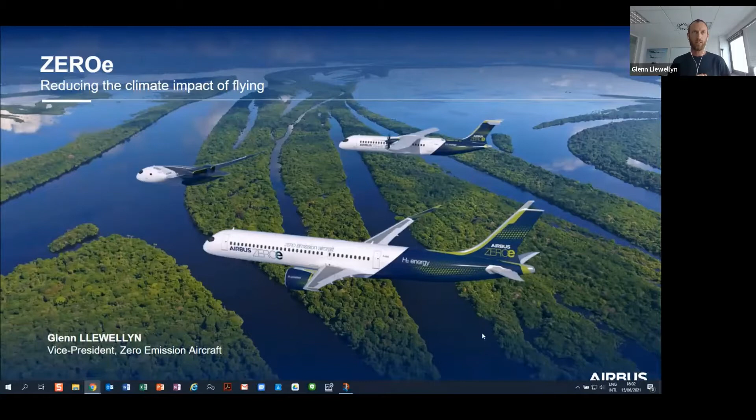I will just share my screen. What you should see in a few seconds is an image of the 3 aircraft which we revealed in September last year - 3 concept aircraft in our family of zero emission aircraft that we are studying. You can see 2 tube and wing configuration aircraft, a turbofan in the front of the image, a turboprop towards the rear, and a blended wing body towards the left. All of these aircraft are hydrogen powered, and we believe hydrogen really has the most potential compared to every other option to reduce or potentially eliminate aviation's climate impact.

I'd like to share with you a little bit about why we're doing this. This is a massive shift for our industry, something we've reflected a lot on, and I'd like to help you understand why Airbus is going in this direction. I'll share more detail about the aircraft and then about some of the technologies we are working on and progressing as part of the project.

So first, a little bit about the why. Many of you will have seen the change in societal expectation and also in regulatory expectation when it comes to climate. We've seen that very much so from Airbus. We started this zero emission project soon after the Paris Agreement, trying to understand how we need to change our business for the future. In 2019, 2020, and even the beginning of 2021, we've seen the trend accelerate quite significantly.

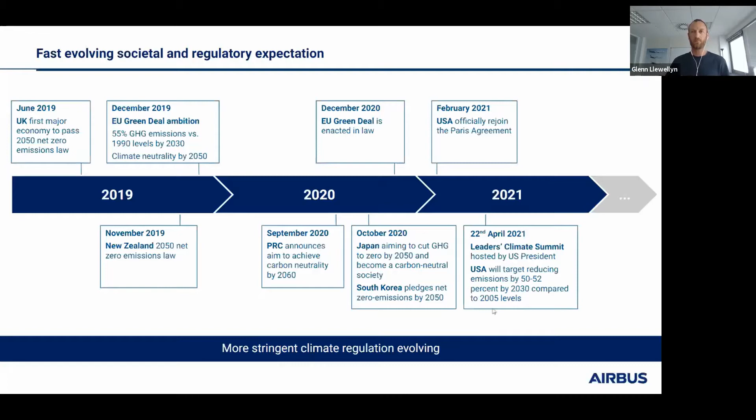The aviation industry has set itself extremely ambitious targets in terms of overall emissions reduction. When we analyze the changes that need to be made, in terms of aircraft performance improvement and energy carriers, we see that all of those are needed. There's really no silver bullet, it's going to be a combination of multiple pathways which gets us the result that we need.

We see sustainable aviation fuels as being significant. Biomass-based fuel is certainly one significant part of the pathway to get us eventually to zero. At the same time, we want to encourage the development of what we call synthetic fuel pathways. We believe that synthetic fuel pathways will provide the scalability, and over time the economics, which allows aviation to continue to grow and emit significantly lower emissions over the coming decades.

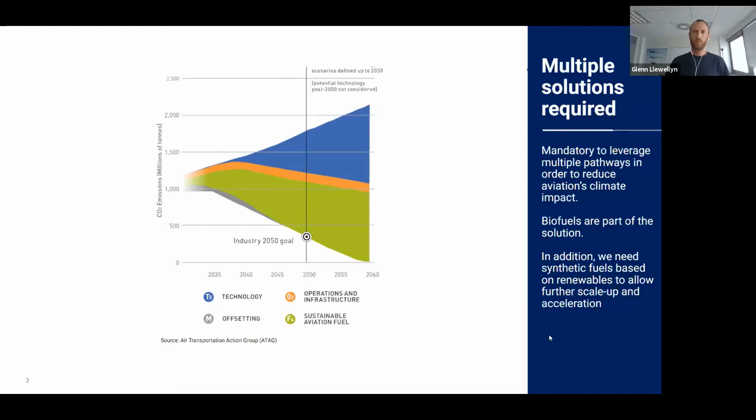If we look at this energy roadmap over time, what we can recognize today is that biomass-based fuels are already available. There's basically no technology blocker in the way of biomass-based fuels being deployed. They are already used on our existing aircraft, which are in fact certified to carry up to 50% sustainable aviation fuel on board. What is missing are the incentives and regulatory frameworks which encourage airlines to have more uptake of sustainable aviation fuel. We believe it's mandatory to get increased uptake as we progress through the 2020s.

In addition to this biomass-based fuel pathway, what we absolutely need are pathways that are a result of, or created by, renewable energy processes. This means we need it to be recognized that aviation can be powered by renewable energy. Of course, we can't put solar panels and wind turbines on board the aircraft, but by leaving them on the ground, we can create surrogates for that renewable energy, which we can then take on board the aircraft, thereby powering aviation with renewable energy. Direct air carbon capture is going to be a key technology in allowing us to do that.

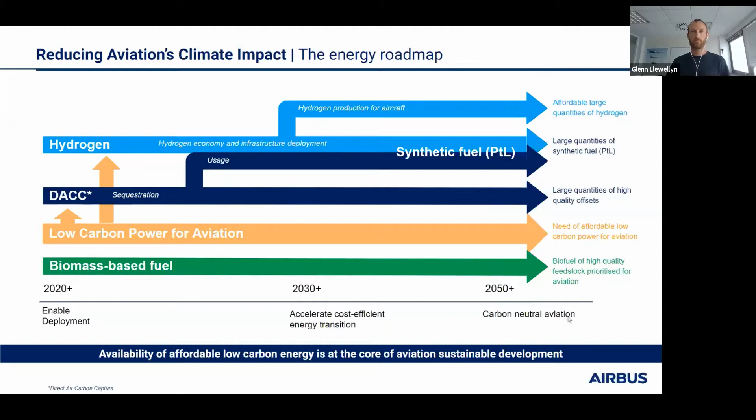Once we start to say that we want to power aviation with renewable energy, it's really important to understand the renewable energy ecosystem. What we've seen over the last decade or so is actually very impressive growth. For sure, in terms of absolute numbers, the growth level is not where we would like it to be, for example to already be meeting the Paris Agreement. But in terms of trend, there is really something promising behind the data.

Consider that the period shown on these charts is mostly prior to the Paris Agreement, and also prior to the coronavirus, which means prior to all of the initiatives to grow back green after COVID, which are having a huge impact on the amount of investment in renewables and green tech. So during that period, we already had a doubling, in fact a multiplication by 5, of the total installed photovoltaic and wind generation across the globe. Our view is that this trend is going to accelerate and that we're going to see these numbers getting much larger over the coming decades. It's one of the reasons why we want to position aviation to be powered by renewable energy, because with this massive scale-up, we believe that cost is going to come down.

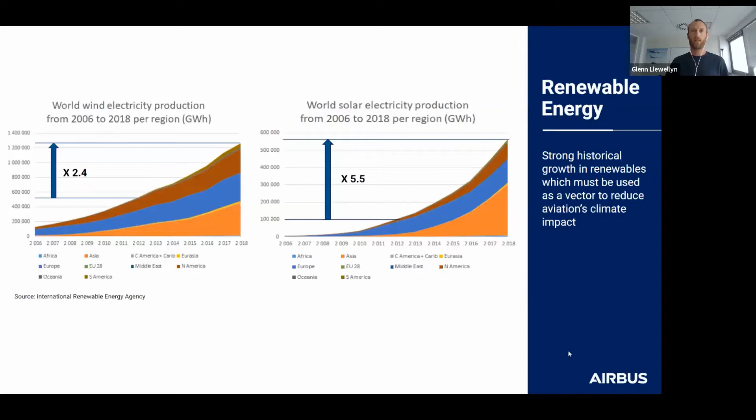Cost has already been coming down and shows signs of being able to come down even more over time. Improving technologies, improved efficiency, competitive supply chains, and the scale-up in industrialization of these different technologies has already allowed quite significant cost reduction over time. All of the analysis is telling us, and telling independent players too, that there is still quite significant potential to bring down the cost of renewable energy.

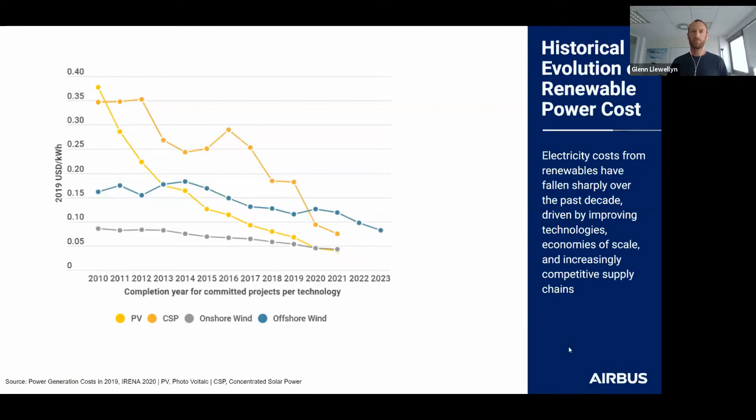If we zoom out, what you see on this chart is the 2010 to 2020 period, the period we've just been talking about in terms of quite fast growth and quite fast cost reduction. What you see is that that's peanuts in terms of the total growth in renewables required to get us to where we need to be by 2050. Those growth curves are really only a small start. The cost reductions are going to be potentially much more significant as this technology is scaled into the next decades.

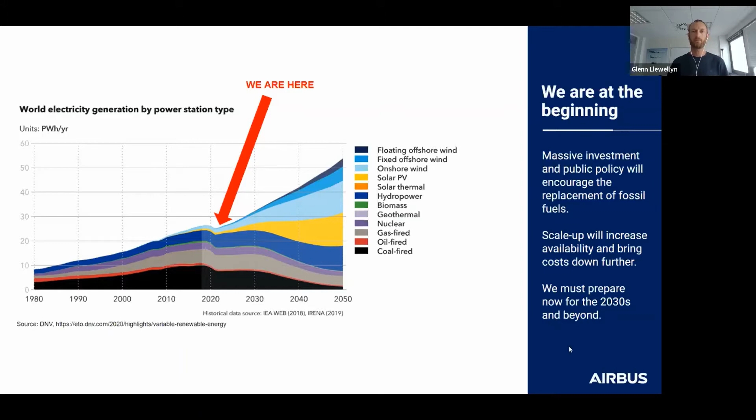What we see is massive progress over the last two years in terms of announcements of concepts or even the commercialization of these technologies. When we first started studying this at Airbus post-Paris Agreement, we could see from our analysis that hydrogen was going to be a big part of society's way to meet the Paris Agreement, but we saw very little signs of hydrogen in terms of demand and supply in the wider ecosystem. We didn't see much news or development in the different companies we were speaking to at that time. When we now look out our window at the various industries, there's a huge change.

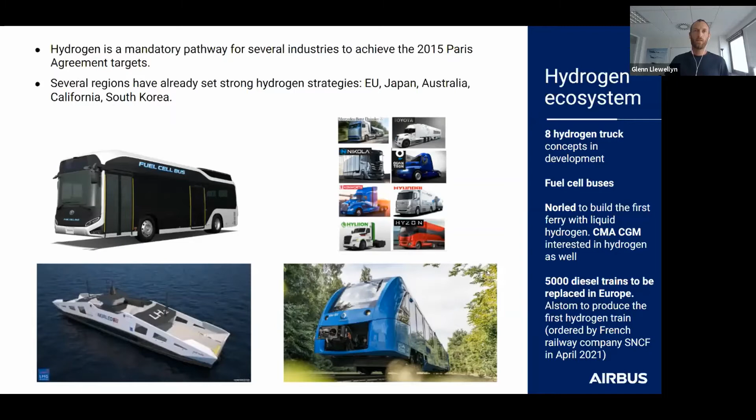If we then look specifically at aviation and where hydrogen is going to help us in terms of reducing and maybe even eliminating our climate impact, there are three basic options for how we use hydrogen on board our aircraft.

I'll speak first about power-to-liquid synthetic fuel. I mentioned it earlier when we discussed the energy roadmap. Power-to-liquid synthetic fuel is the fuel where you have direct air carbon capture, taking CO2 out of the air, providing the carbon for the hydrocarbon, and hydrogen providing the hydro.

The advantage of that fuel type is that it is already compatible with existing aircraft, up to 50% on aircraft already certified today, and we will quite easily certify up to 100% over the next few years. So technically, it's not going to be a huge challenge.

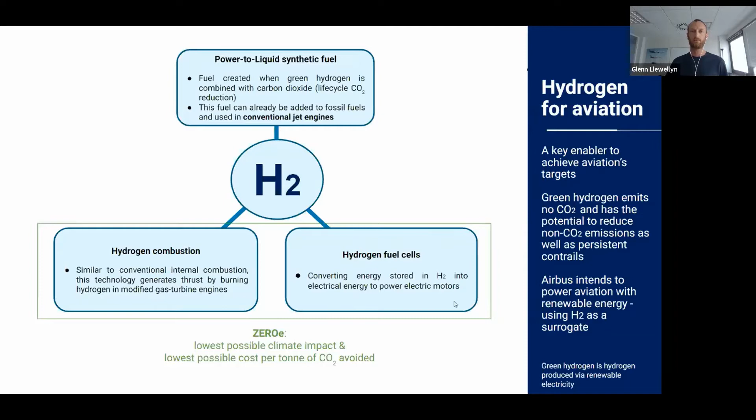The blended wing body is probably the one that the media have certainly been the most excited about. It's for sure an attractive long-term option, but it is the least likely of the three options in terms of what we're going to take to market by 2035. It has a completely new airframe and set of aerodynamics, combined with a very different propulsion system. We judge it to be too much to change both in one single step.

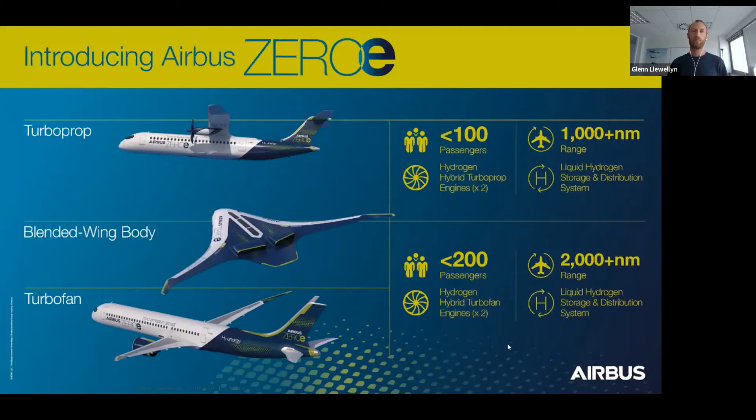All of these aircraft are the aircraft that we revealed in September 2020. They are all hybrid electric aircraft, meaning that they have a gas turbine and a fuel cell on board in a hybrid electric configuration.

It has, in this case, 6 propulsion units. Each of these propulsion units or pods have the electric motor, power electronics, fuel cells, and in fact also have the hydrogen storage located in these pods beside the rest of the system.

It's a concept that we're still studying, exploring in terms of its scalability and its economics. It's interesting in terms of its climate impact. There is no combustion and therefore no NOx. Contrails could probably be close to zero because you can manage how the water leaves the aircraft, but still lots of better understanding that we need to have in order to really understand the scale that this kind of technology could go to.

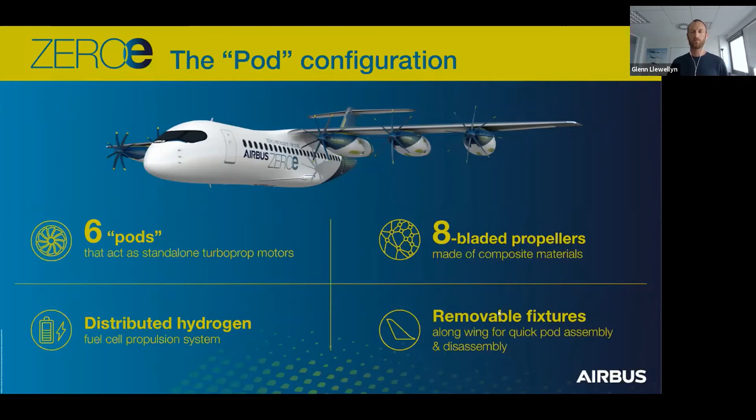What we see are certainly some major technologies that we need to develop. We need to improve the performance of, we want to reduce the weight of, in order for it to be relevant for commercial aviation applications.

The hydrogen-powered gas turbine is something in terms of technical feasibility which is already being demonstrated. In the 1950s, the B-57 flew with the US Air Force, powered by hydrogen. In the 1980s, a Tupolev 155 flew with hydrogen. So in terms of basic fundamental technical feasibility, that's demonstrated. Now what we need to do is develop that technology further in order to make it adapted to commercial aviation. We have engagements with all of the major engine manufacturers as part of our work to do that.

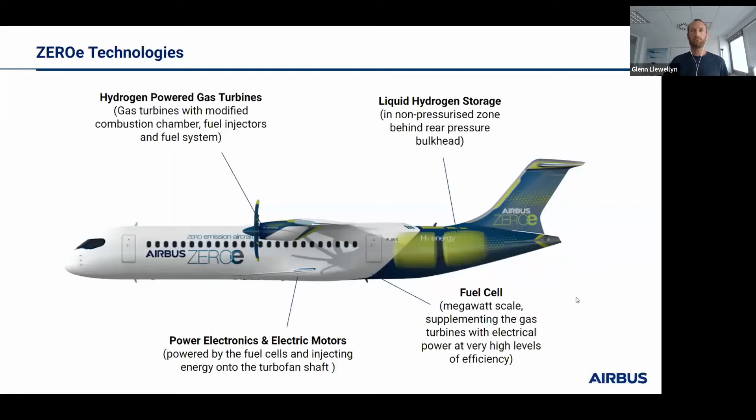When you start to pressurize it, you can improve things. You can take that 3,000 down to 6 liters if you pressurize it at 700 bar. That's about the limit of what the automotive industry is doing, so that gets you to that point. Then what we want to do for aviation applications is liquefy it, turn it into a liquid by cooling it cryogenically. Once we do that, we can get it to 4 times the volume of kerosene. There is still a difference in volume compared to kerosene, but with the weight difference helping us in the positive sense, the penalty in terms of volume is somewhat counterbalanced at overall aircraft level.

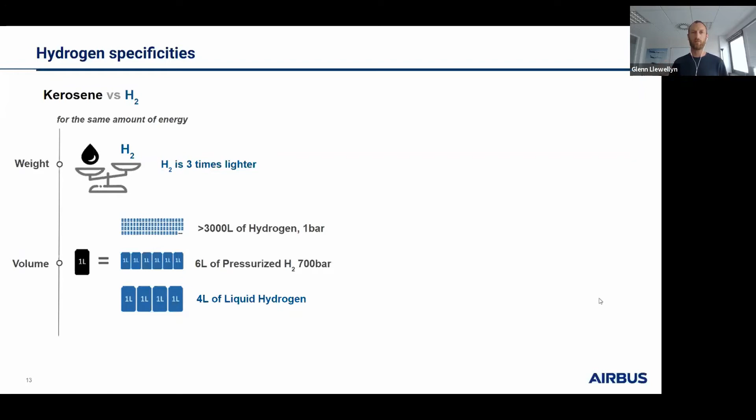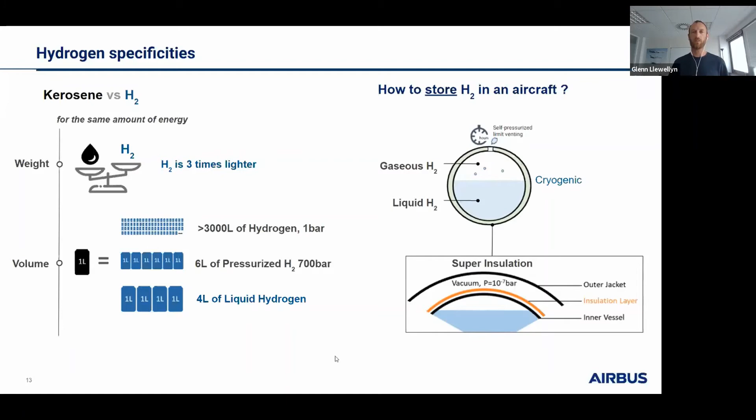The hydrogen, once we decide to store it cryogenically, gets stored in a twin-walled vacuum insulated tank. That is super insulated, with an outer jacket, an insulation layer, and then an inner vessel. As I mentioned earlier, that technology has already been demonstrated in the automotive industry, but it's something we are working on in order to develop it for aviation, commercial aviation applications.

Then there's a question about where do we store hydrogen, given that it has extra volume compared to kerosene, and the way we store it is quite different in these twin-walled vacuum insulated tanks. It leaves us with various options for storing the liquid hydrogen on board. The concepts I showed you earlier and revealed to the public are a small subset of the total concepts we've been studying.

We can't store liquid hydrogen in the wings. So we've got to move towards podded configurations, dorsal configurations, caudal type configurations. There are configurations which are hybrids between some of these and others I'm not going to go into detail on. But clearly the design space is opening right up in terms of aircraft configuration. We're in the process right now of converging on what will be the final aircraft concept we want to take to market by 2035, and the tank configuration is obviously going to be a big part of that.

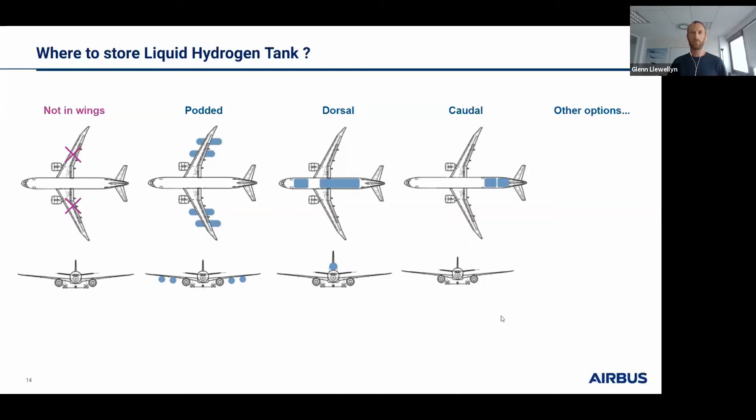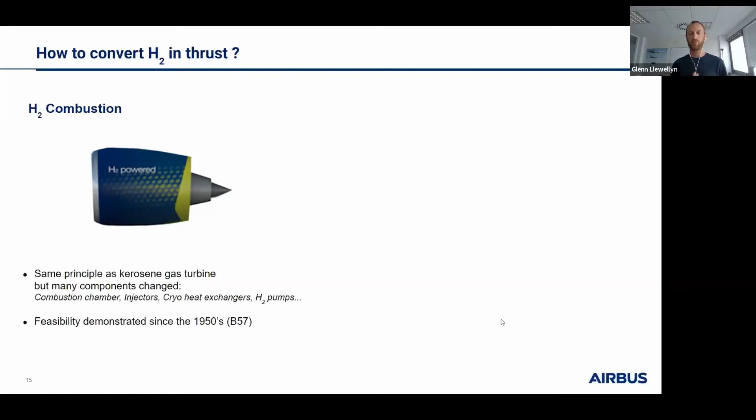Then in terms of the propulsion system, we spoke about hydrogen combustion having similar principles as the kerosene gas turbine, but with several components which are changed: the combustion chamber, the injectors. We need cryo heat exchangers to take the hydrogen from cryogenic form to liquid form up to gas form, and we need hydrogen pumps. Today's kerosene pumps are far different from what we have as requirement for hydrogen aircraft. The basic feasibility has been demonstrated since the 1950s.

The other way of generating power on board the aircraft is with fuel cells, so we produce electricity to power electric motors. Water is the only byproduct, and we have higher efficiency in the fuel cells, but higher weight and drag versus a gas turbine. So it's important to be able to analyze all of this at aircraft level and decide for the different market segments what the best option is for the economics of the aircraft.

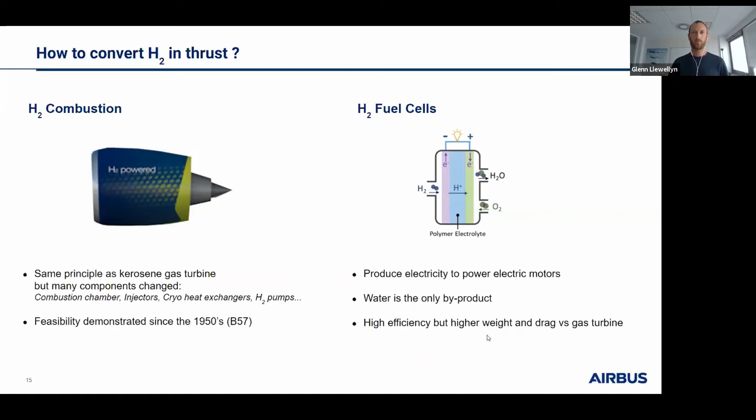We also can combine the two kinds of propulsion systems that I've been talking about. We have the gas turbine, which can also be powered by an electric motor, so you have an electric motor embedded on the central shaft of the gas turbine. That is then powered by fuel cells, and all of it powered by liquid hydrogen storage.

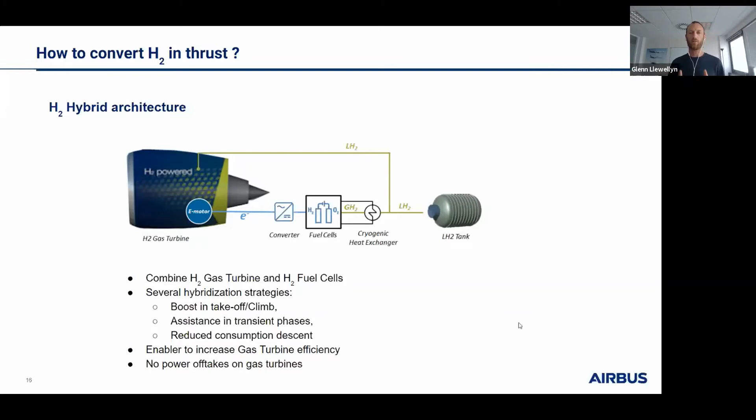The reason we would do that is because you can have several hybridization strategies which overall make your propulsion system quite efficient. You can boost during takeoff and climb using the electrical power source, which reduces the sizing of the gas turbine and makes it more economical during cruise. We can have assistance in the transient phases as it goes from one phase to another, coming from the electrical sources, and we can have a reduced consumption descent where we idle back the combustion part and use the fuel cells to power the engine. All of this enables us to increase the gas turbine efficiency and the overall propulsion system.

All of that technology is a key part of the ZEROe development, and it's mandatory that we're successful in advancing the technologies over the next few years to the point we need.

On top of the technologies, it's going to be critically important to have the right ecosystem. You will all know that hydrogen doesn't exist at most airports, and where it does, it's only in small quantities. If we want the ZEROe to be successful, that has to change. So we're working with several players, and there will be many announcements over the next years about collaborations we've initiated on this topic, because it's critically important for the overall success.

We believe that during the 2020s, airports can become hydrogen hubs, serving the wider community and the local airport ecosystem with zero-emission hydrogen. Airports are heavy vehicle hubs. Trucks go to airports because they are cargo hubs. Buses go to airports because they're passenger hubs, and hydrogen aircraft will go to airports because they are passenger hubs. So all of this makes airports ideal candidates to be hydrogen hubs, where they can serve numerous applications already in the 2020s, preparing for the scale up of hydrogen for aircraft in the 2030s.

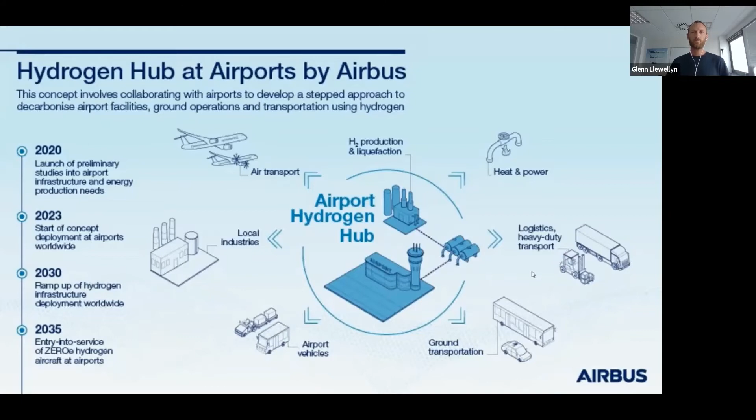Our overall timeline starts really with 2035. This is the entry into service date, which we are targeting for the first zero-emission aircraft. And if we work back from that, what it essentially means is that we need to have decided on the product we want to take to market by around 2025.

Between now and 2025, we need to decide the aircraft configuration, including some of the questions we shared earlier. We need to mature the technology, flight demonstrate propulsion systems, so hydrogen propulsion systems, and demonstrate them in flight before we finalize the product selection. And then we also need to establish the ecosystem, which, as I mentioned, is critically important to the overall success.

We had the pre-program launch in September last year, and the project start for ZEROe specifically in 2018. I believe that this is a very exciting adventure for Airbus. I think it's hugely important for the aviation industry. If you think you can help bring zero-emission aircraft to reality, please reach out. We recognize that this is a team sport and one that we will need to join together in order to achieve it. I'm looking forward to your questions.

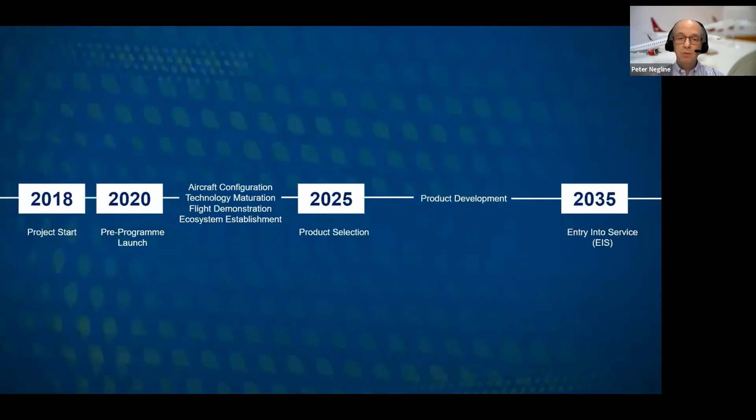Sure, so I can definitely share the slides, maybe to give a rough answer right now. We estimate that hydrogen in its various forms, so this means synthetic fuel as an ingredient to synthetic fuel, and also as used in its raw form on aircraft, it needs to contribute around 50% of the CO2 emission reduction that the aviation industry needs to achieve. So hydrogen is going to be massive, needs to be massive if we're going to achieve our targets.

Okay, thank you. The next question comes from Paul, who asks, when talking about H2 or hydrogen for aircraft in the ZEROe series, would that be fuel cell powered electric aircraft? So I think you may have answered this, or how does the aircraft consume the H2, the hydrogen fuel?